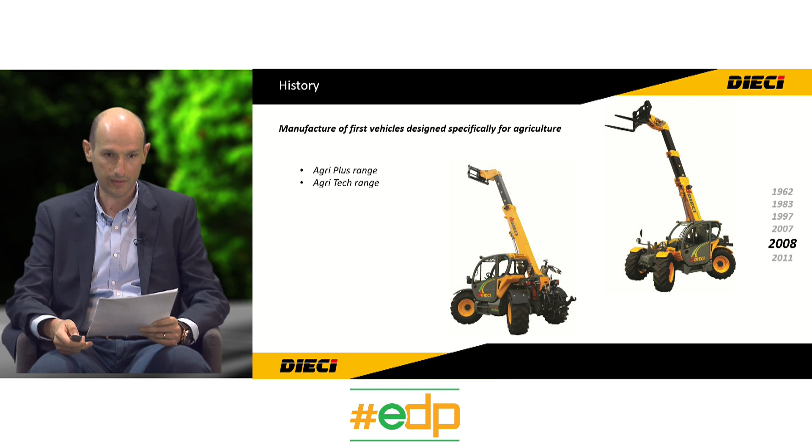Today, the facility of Dieci reaches a surface of 120,000 square meters, of which 40,000 covered. Dieci is represented in 70 countries around the world with 440 dealers and 3 branches. The production of machinery of Dieci in 2019 reached 2,800 machines, and the turnover reached 163 million euros.

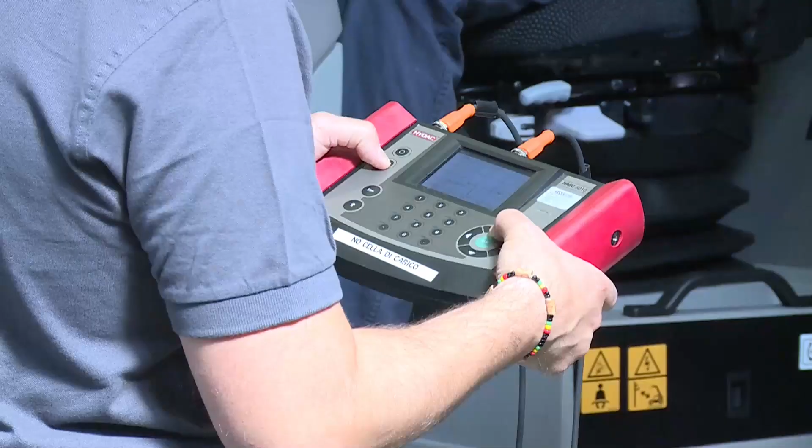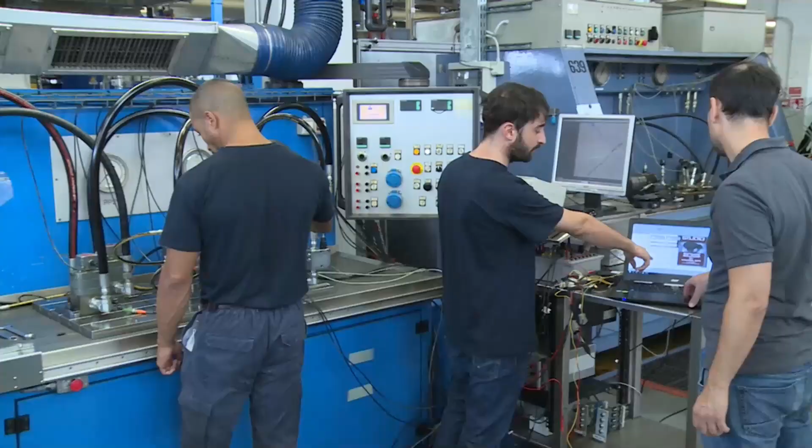Yeah, and we know from direct experience how much Dieci is investing in innovation and always trying to get improvement in the machinery evolution. I will briefly explain the context where the ALS solution was born. The ALS solution was conceived in Walvoil research and development. Walvoil is a company that is investing a lot in research and development, and the research and development department is strictly collaborating together with our test department. The test department of Walvoil is probably one of the most advanced hydraulic laboratories that we have in Europe, and there is a possibility to develop the complete product and also test on the machine.

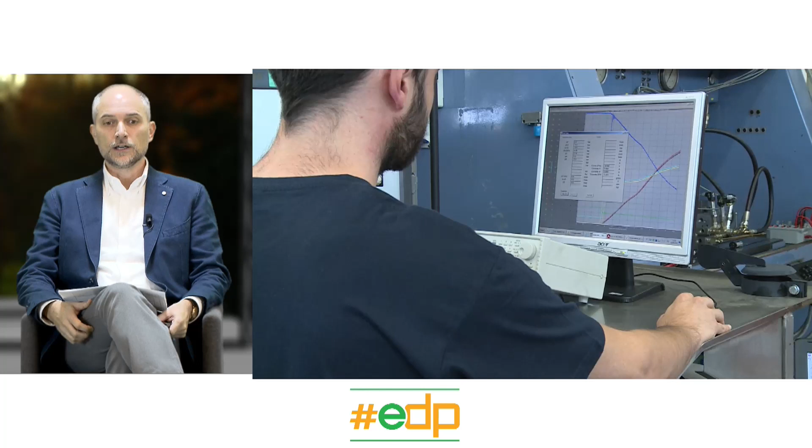The research and development of Walvoil is very focused on the environmental issue. We are always trying to find a better solution with a higher efficiency, and we are mainly focusing on two different lines of research. The first is energy recovery, but we will not talk today about this point. The second line of research is the combination of components, trying to find the ideal matching of different components in order to maximize the efficiency on the machine.

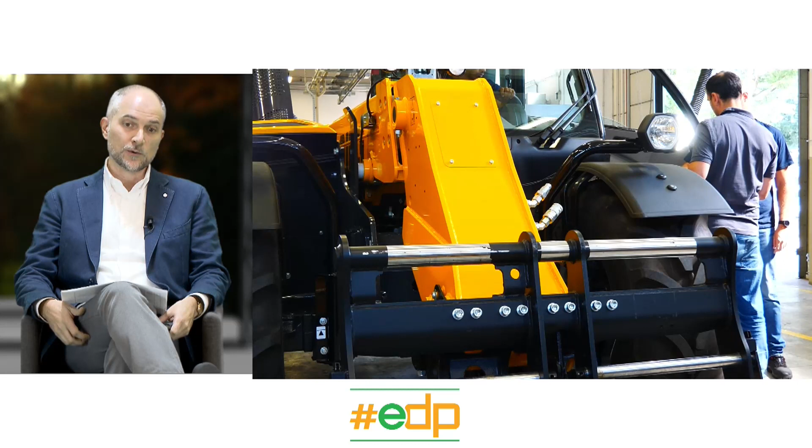This is the way where Walvoil is investing and trying to find the answer, always providing a better solution for the market and also helping our customers in finding a solution for the challenges that are coming from the market itself. We know that the machinery market is getting more and more difficult due to the regulations and the standards that are coming, and so there is a real need. We strongly believe that there is a bigger space to improve the efficiency of the hydraulic circuit.

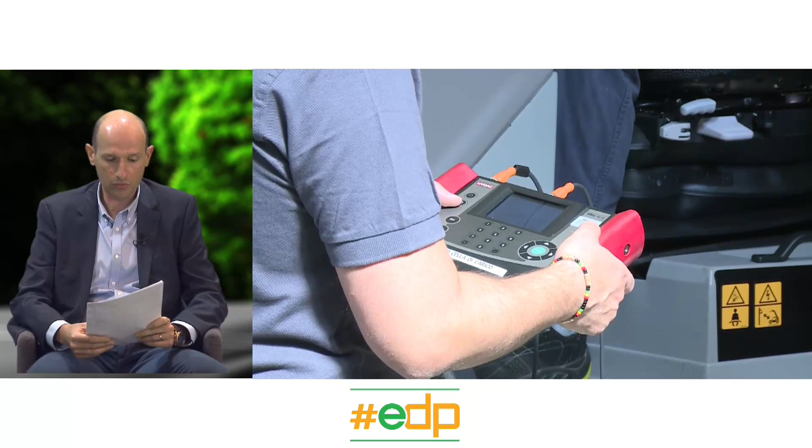Can you tell us a little more about the context of the machinery development? Yes, the stage 5 compliant diesel engines are the last frontier in terms of emission limits. In addition to seeking the engine pollution emission limits, machine manufacturers such as Dieci are pushed towards a search for vehicle efficiency in all contexts of use.

The advanced electronic vehicle control management system allows integrating the different systems contained in the machine together with the diesel engine, including the hydraulic system. This is very important in the thermal management phases of the exhaust treatment system during the machine work to ensure high comfort and control to the operator.

Yeah, and Enrico, you highlighted very well how important it is to match the mechanics and the electronics in order to find a good solution for the efficiency of machinery. And Francesco, you are a mechatronic engineer, so nobody better than you knows how important it is to match these two domains together today.

Yes, Davide. We know that the integration of mechanics and electronics can allow us to explore new possibilities and features in the hydraulic field. Walvoil believes in this technological progress, and thanks to the electronic component, it's possible to provide new operating modes for the operator on the machine in order to improve the operator experience. So thanks to this software, it's possible to customize and shape

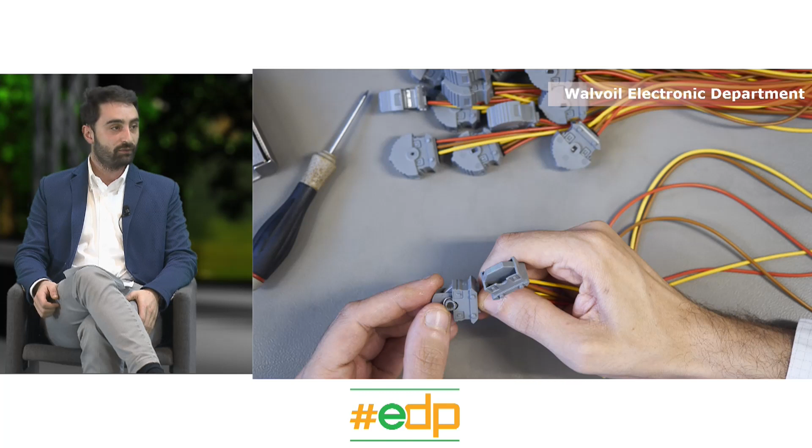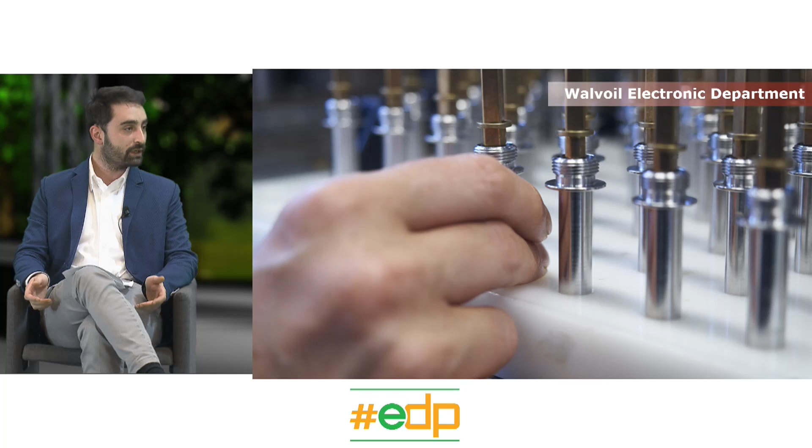some movements on the machine, and this is possible thanks to this software and the experience of the Walvoil electronic department, with 20 years of experience and a wide range of products, starting from the handles and joysticks for the movement of the hydraulic components, up to sensors and software to monitor the parameters at stake.

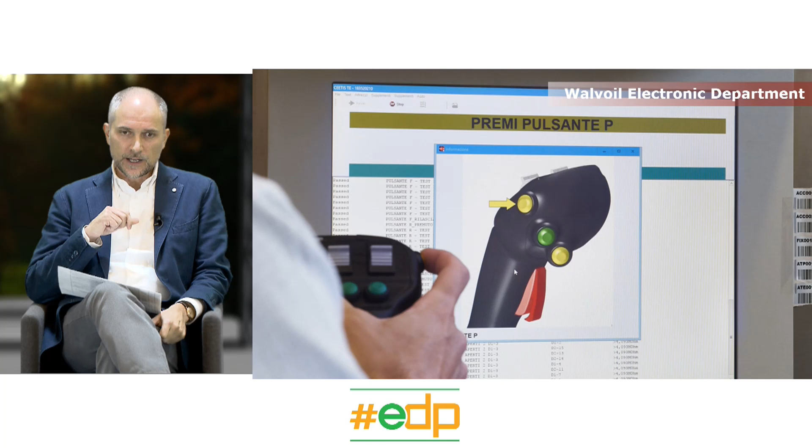Okay, a very big challenge. I think we can go a little deeper into the system and try to understand how the ALS system works. We have a presentation where we can show you the details. So we will start this presentation.

Okay, the ALS system is perfectly matching together with the flow sharing valves. It actually matches with whatever flow sharing valve is available on the market, but of course it has been optimized and works in perfect combination with the Walvoil flow sharing valves. The Walvoil flow sharing valves are normally split in two big families, the DPX family and the EX family, that are approaching the world of different machinery with two slightly different technologies.

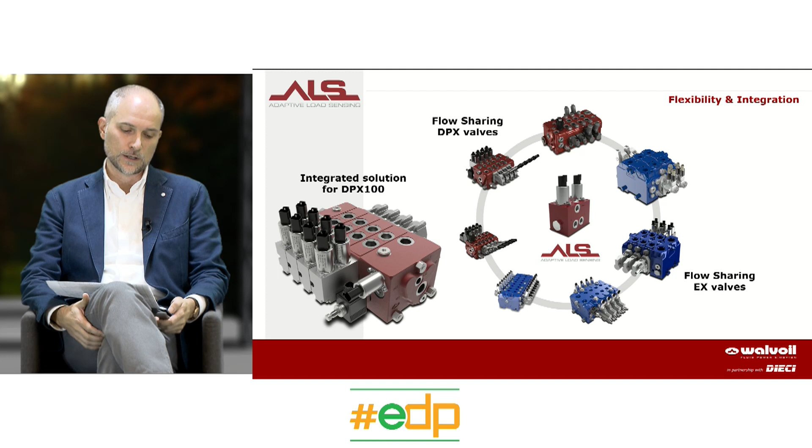So we go directly to the point, to the problem. When you have a hydraulic valve block connected to a variable pump, you are always paying a certain dissipation given by the controller of the pump. In order to realize perfect controllability of the system, you always need to provide a pressure that is higher than the pressure actually required by the user, by the load.

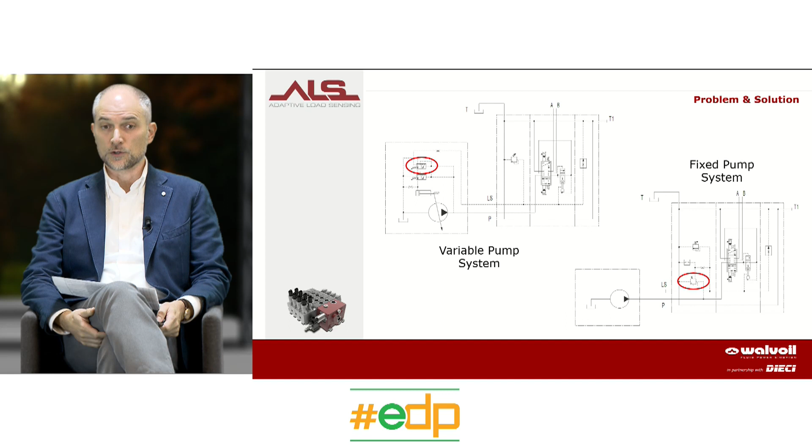Also, if you work with a fixed pump, of course, this kind of system is more economical, more cost-effective, but also much more inefficient compared to the variable system. In this case as well, when you are using load sensing and flow sharing valves, you are paying a dissipation through the inlet compensator spool, which always provides an additional pressure drop that is functional to the controllability of the load.

So when we analyze the power situation, we can see that if the actuator actually needs a certain level of power, represented in blue, every time you have to add additional power that goes completely into dissipation in the system, represented by the orange area. If you consider that in a normal cycle an average working pressure could be maybe 100 bar, this standby margin normally represents 20, 25, sometimes even 30 bar, so it can represent even more than 20% of energy dissipation in the system.

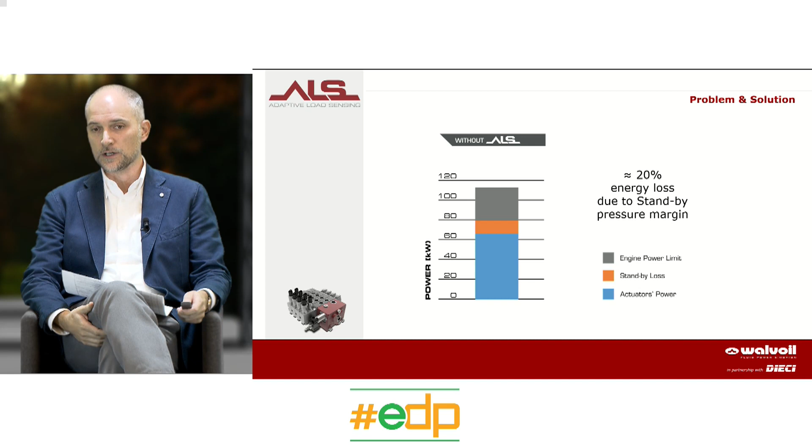So the aim of the ALS system is exactly to introduce a new variable into the system, with the possibility to modulate and modify this pressure margin according to the working condition, in order to optimize the system and find the best efficiency condition to work.

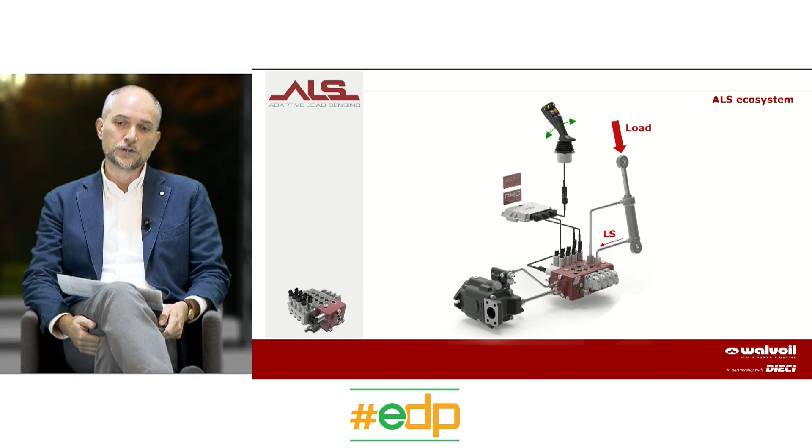This is a representation of the complete system where you can recognize the variable displacement pump, the valve block that is including the ALS device, an electronic joystick, an ECU controlling and giving the brain to the whole system, and one actuator. When you operate the joystick through the ECU, you displace the spool of the main valve and you are feeding the actuator. The actuator can send the pressure information to the valve through the LS line.

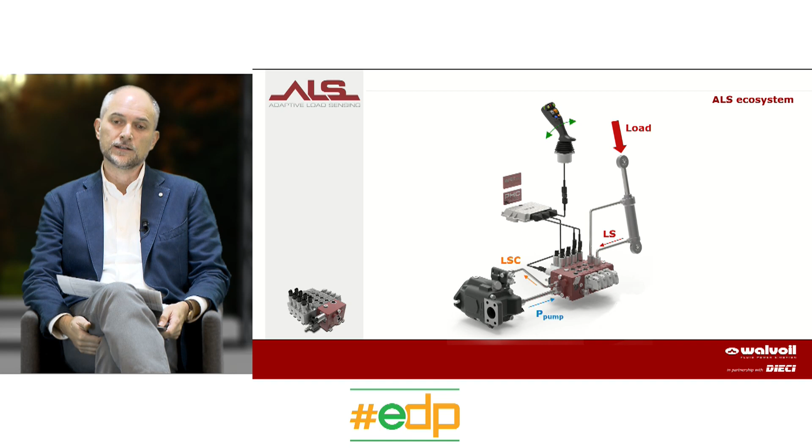Normally, this LS line is transferred directly without any change to the pump, but in case of the ALS, it is modulated by the ALS itself and modified into the LSC signal, so that the pump can provide a pressure that is related not to the real load sensing, but to the modified load sensing signal LSC.

So if you want to check how it works in a diagram, here you can see that the joystick is giving information to the ECU. The ECU is communicating to the valve. The valve is collecting the real load sensing from the load, but then this load sensing is modulated through the ALS system, thanks to the input coming from the ECU. And this LSC is delivered to the pump.

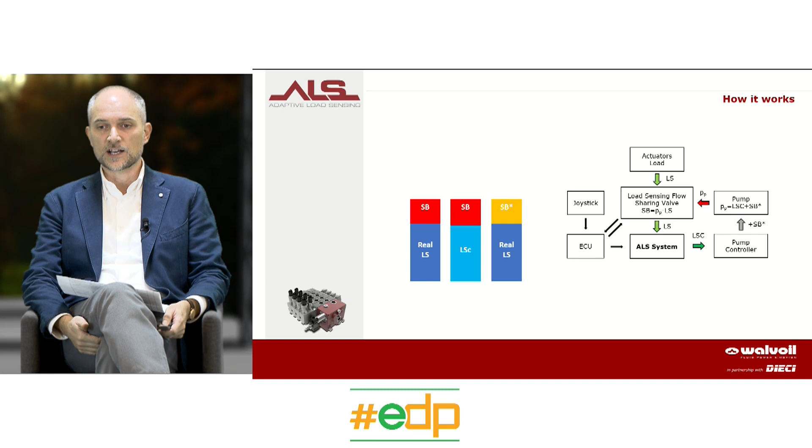The pump will add its natural standby, but the pressure P that is resulting into the system is actually modified and resulting in a different pressure drop across the spool. Here this animation is showing the variable standby that you actually have on the spool of the valve, and so you are conditioning the speed and the control characteristics.

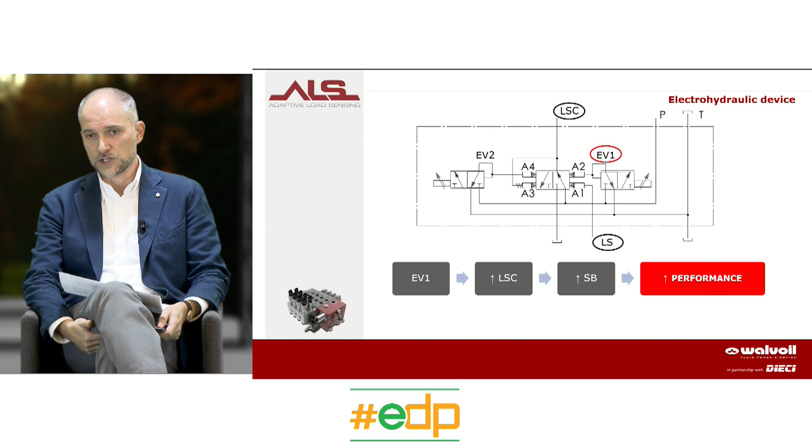The heart of the ALS system is a simple hydraulic hardware that is mainly represented by a copying spool based on a 4-signal solution. And this copying spool is conditioned by 2 pressure-reducing valves. The first pressure reducing valve is deputy to increase the load sensing, the LSC signal, and therefore to increase the standby, and this is giving an additional performance to the machine, while the second electro valve is deputy to reduce the LSC, therefore reducing the standby and giving more controllability and more energy saving possibility.

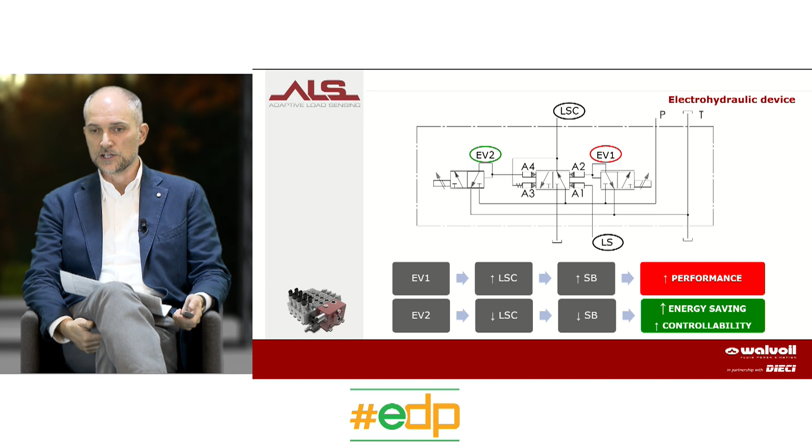During the development, we had the opportunity to release a patent that has been already approved. We thank the organization of EIMA; we have the honor to have received the award for both innovation and sustainability for this project. And it is also worth noticing that this project was developed also in collaboration with the TASC project. The TASC project is a project that has been financed by the European community, is involving the most important laboratories and universities in Emilia-Romagna, and Walvoil is participating as an industrial partner.

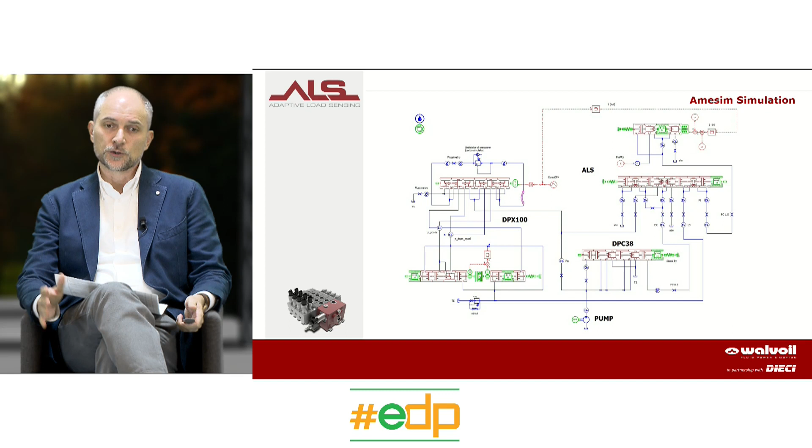Okay, during the development of the ALS, we went through 3 different phases. The first phase was the simulation that we made through monodimensional software in order to check and analyze the possible benefits of the solution. Then we went into an experimental phase where we tested the complete system on our test bench. Here we also have an output from our test bench.

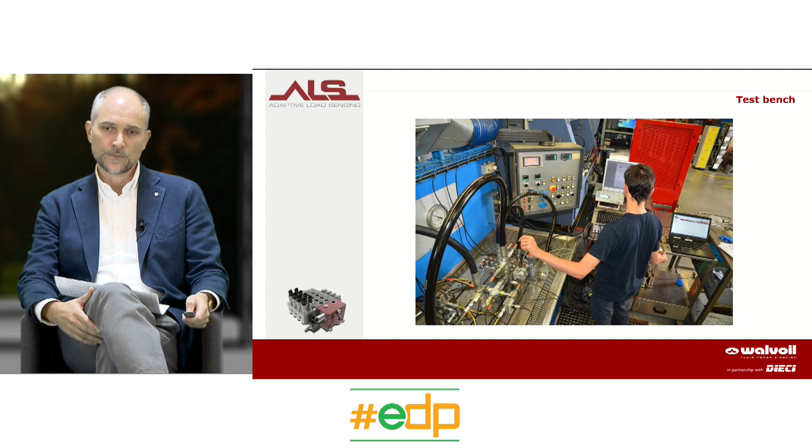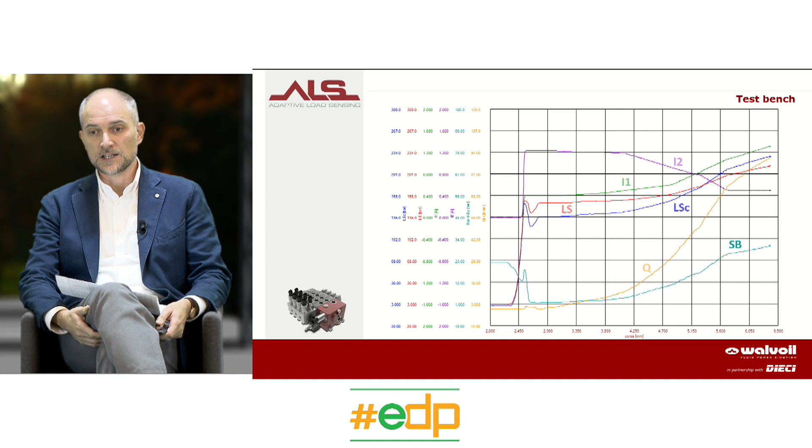From this diagram, the most technical of you can see that we have a modulation in purple and green of the 2 electro valves, and this modulation is resulting in a modification of the LSC. As you can see, the natural load sensing is in red, but the modified load sensing, LSC, is in blue. So we start with a reduced load sensing, and then at the end of the stroke, we reach an increased load sensing. This allows to change the standby across the valve from 1 bar up to 30 bar, shaping and modifying the delivery flow onto the actuator.

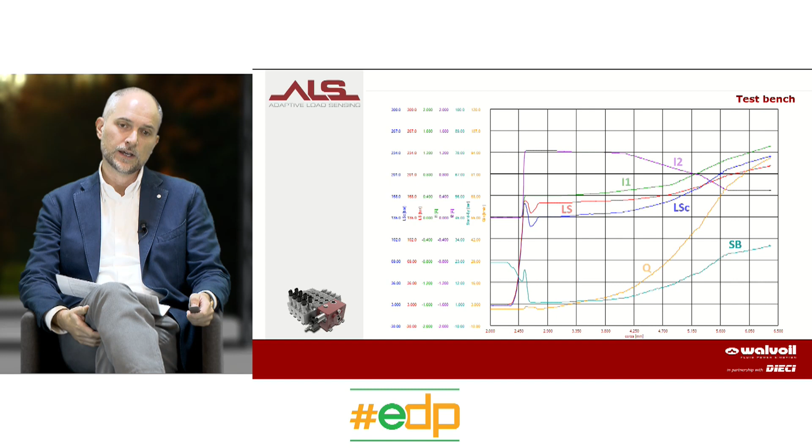Then we have a third phase, and the third phase is the application of the system on a real machine to test the benefit and understand what is the real result on a real machine. And here is coming the collaboration with Dieci. And so, Enrico, can you tell us why you chose this kind of machine and which are the characteristics of this machine?

Davide, we chose the Agri Plus. That is one of our most important machines for the agricultural market. Agri Plus is in 2 models, 42.7, 4.2 ton lift capacity at 7 meters, and 40.9, that is 4 ton lift capacity at 9 meters.

Agri Plus is a high-performance telehandler that we developed and studied for professional use, for customers that need high performance on telehandlers. The Agri Plus includes the new cabin developed together with Giugiaro Design, where we introduce many improvements focused on the comfort of the operator. It's a wide cabin with precious materials, soundproof materials, with an exclusive hydraulic suspension system.

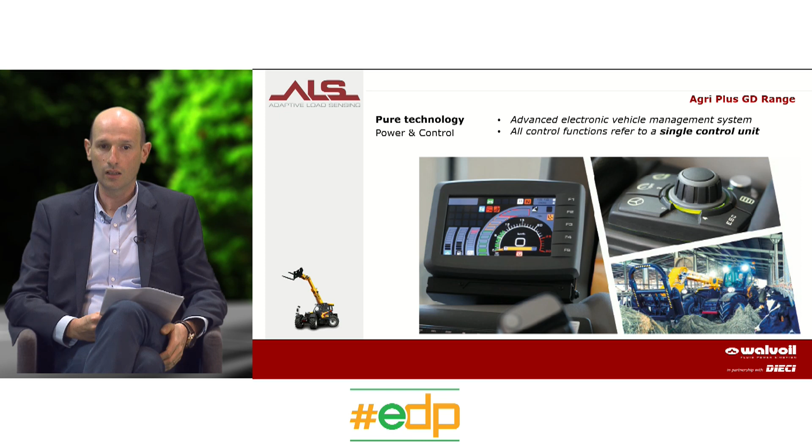In the Agri Plus, we introduce high technology with an advanced electronic management, and by a single control unit, we can manage all the functions included on the machine, integrated with the diesel engine.

With this high technology, we give a high performance machine with a high performance engine, 114 kilowatts, stage 5, with an electronic integrated control and a low emission. This integrated electronic management system performs also a very strong and fast transmission with a cruise control in the cabin that can manage 4 different drive modes. And combined with these drive modes, we can add also the management of ALS.

Okay, thank you. Very interesting.

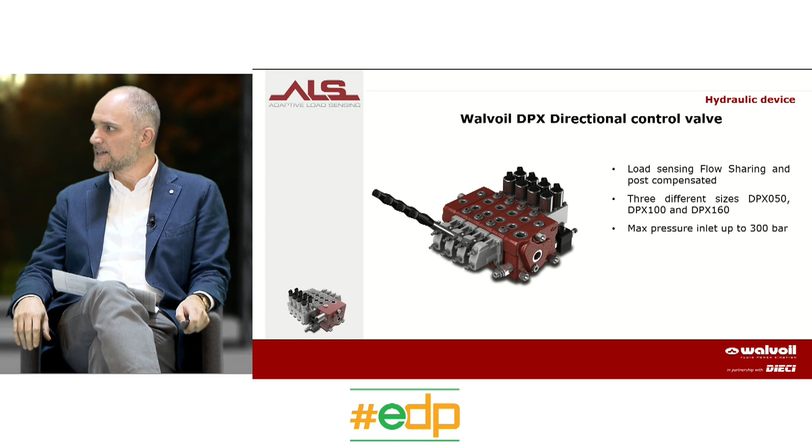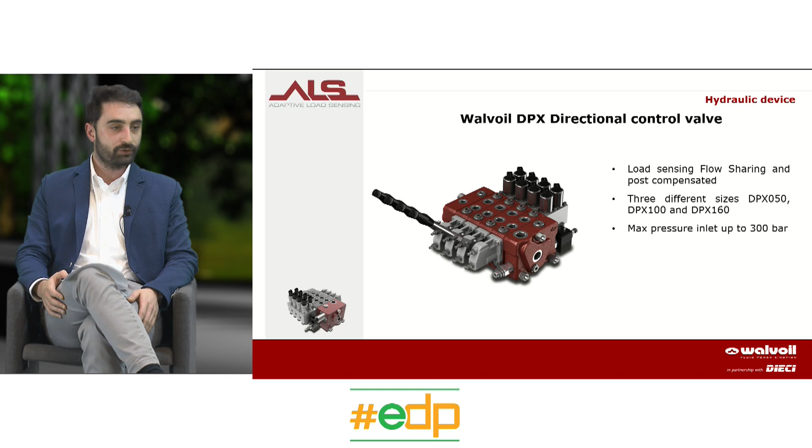If we go a little deeper inside the real hydraulic heart of this machine, we can summarize which are the main components that are taking part in the ALS system. Yes, the ecosystem ALS is composed by Walvoil DPX. The DPX family is a family of post-compensated load sensing flow sharing section valves. And there are 3 different sizes of DPX, the DPX 50, 100 and 160. The difference between these sizes is the workflow port, and the 3 sizes have the same max pressure inlet up to 300 bar.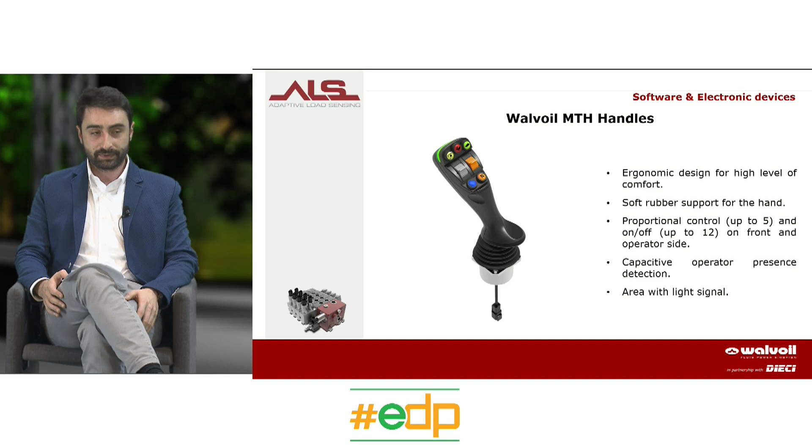The second component for the ALS ecosystem is the Walvoil joystick. This joystick can be in 2 different versions: an analog version, the AJV, with an optional redundant signal, and a CJV with a redundant signal, but in a CAN bus version. And in order to have an ergonomic design, it's possible to use the Walvoil MTH handle. This handle has a capacitive sensor that can detect the operator presence.

But the real heart of the ALS system is the Walvoil ECU, in particular the CHED 1200. With this ECU it's possible to control 12 sections of section valves, and with the 24 inputs it's possible to acquire digital, frequency and analog signals. And there are also 2 sensor supply outputs. And then the software, finally.

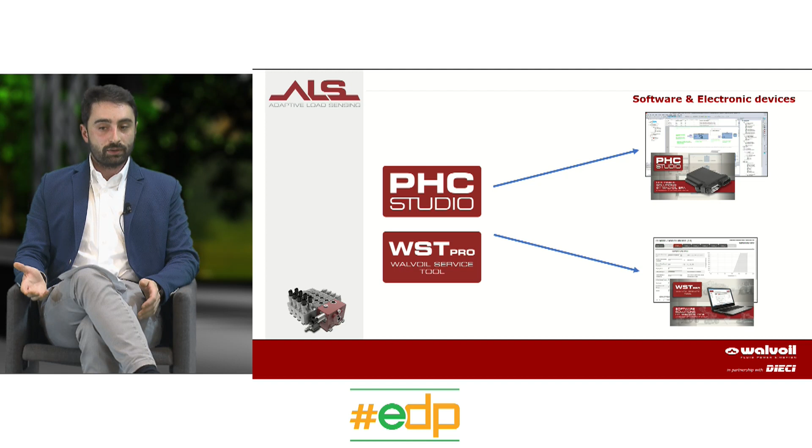With the PHC Studio, the proprietary Walvoil software, it's possible to program the ECU with one of the programming languages cited by the IEC standard. The WST is a proprietary software of Walvoil, and with this software it's possible to monitor the working parameters in real time. So for custom applications we use the PHC Studio, but for standard applications it's possible to use WST.

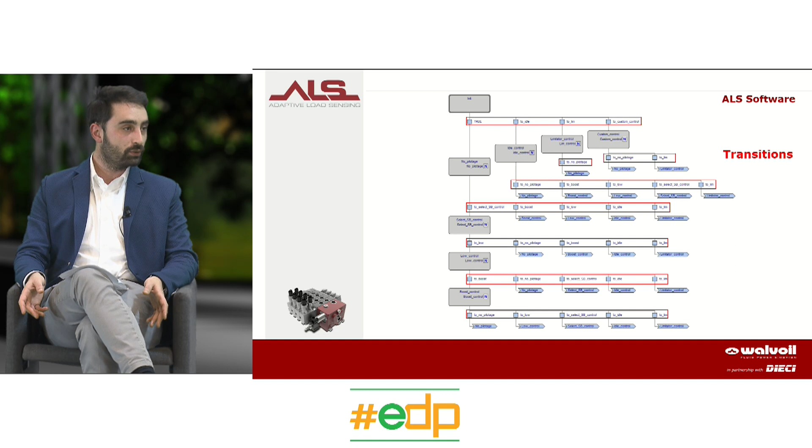Now it's the ALS software moment. The ALS is programmed with an SFC language, a sequential function chart, and with this software it's possible to obtain all the modes of the ALS. In particular, there are transitions and actions that command the different modes of the ALS system. With the transitions it's possible to exit or enter different actions. So when a transition is verified, this means that the operator wants to change the operating mode from the actual one. And the actions contain the instructions for the operating mode that the operator has chosen.

Okay, great. So which are the functions? Yes, the ALS has 2 types of activation: desired activation by the operator or automatic activation by the software. For example, this is a security when the machine is on, and an automatic activation can be the power limitation. But the desired activation by the operator, the basic function of the ALS system, can be the boost or the precision. With the boost, it's possible to increase the flow rate to the actuators in order to have greater machine speed and productivity with an increase of standby.

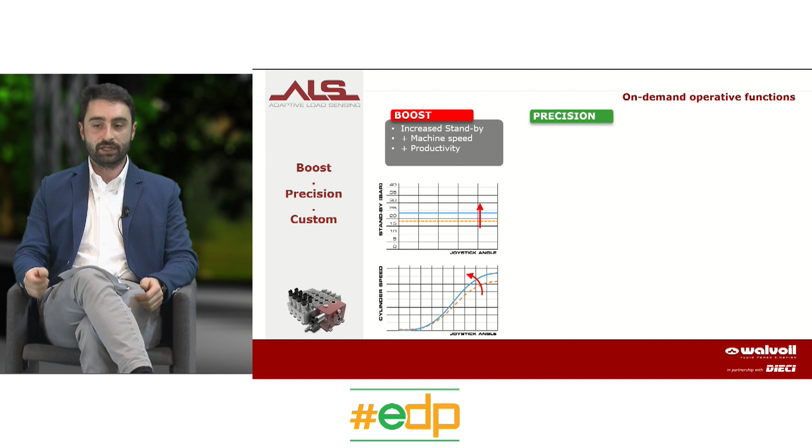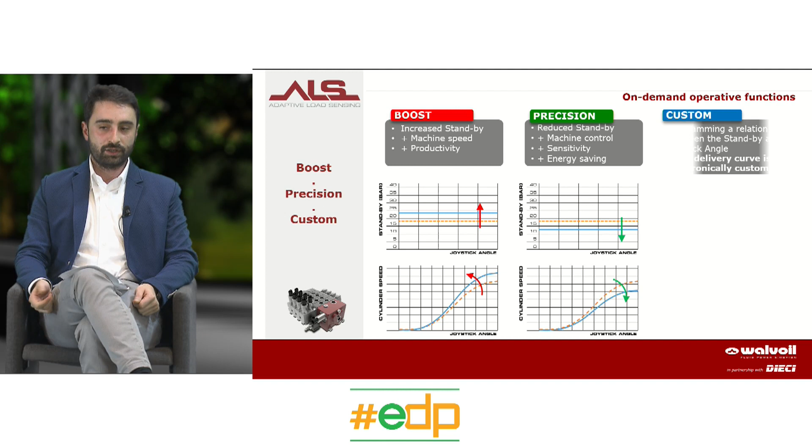On the opposite side, there is the precision. With the precision mode, it's possible to have greater machine control and sensitivity because we have a reduced standby and flow rate. But the most important function in this case is the custom. This is a function that is a combination of the two previous modes. With the map that correlates the angle of joystick and standby, it's possible to obtain a custom curve tuned for some particular application on the machine.

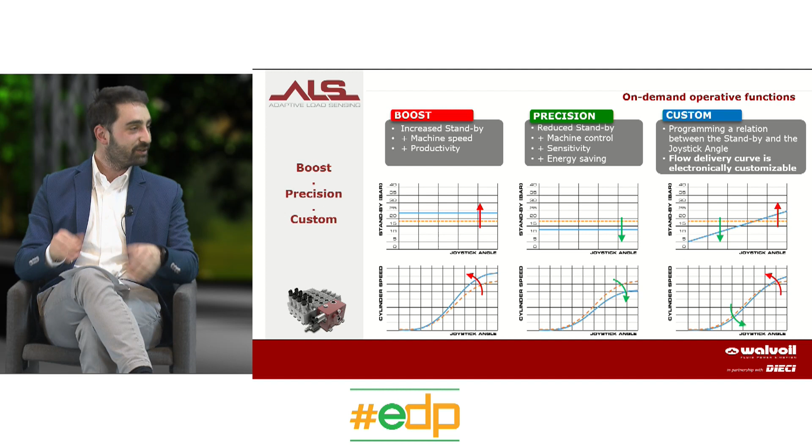So we can shape exactly the delivery curve to the actuator, customizing it and also making it more comfortable. Yes, for example, in the initial part of the curve, it's possible to obtain precision. So for a movement that requires bigger machine control, it's possible to obtain precision at the first part. But when a movement is ended, it's time to go, and the boost condition is activated.

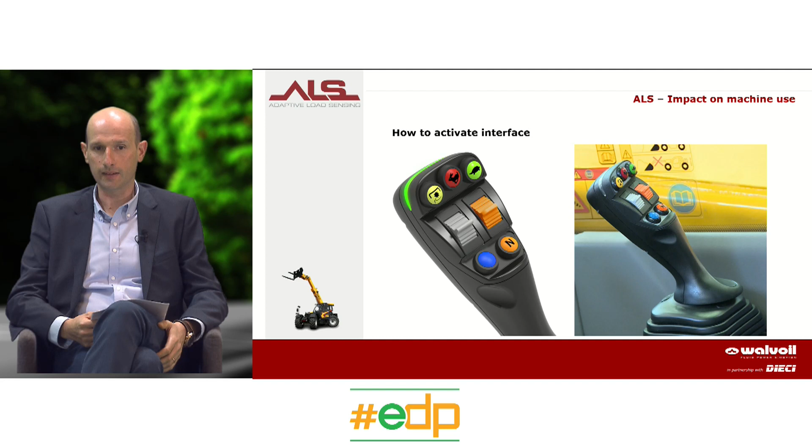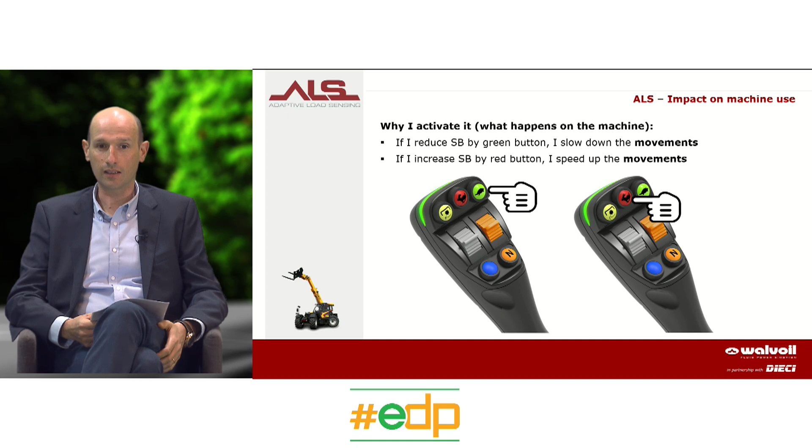Okay. But on the machine, Enrico, how is it possible to activate the ALS system? Yes, we integrated the ALS activation system with two buttons on the grip of the joystick, the green button and the red one. Acting on these two buttons, the operator can ask for standby reduction or standby increase. If we push the green button, the standby is reduced and the movement slows down. If we push the red button on the grip, the standby is increased and the movement speeds up. Yep.

And this means reducing the speed of the movement, even if the stroke and the angle of the joystick don't change. So without losing the resolution of the control? Yes, and the main benefit of this is the better sensitivity and better control for the operator. Okay.

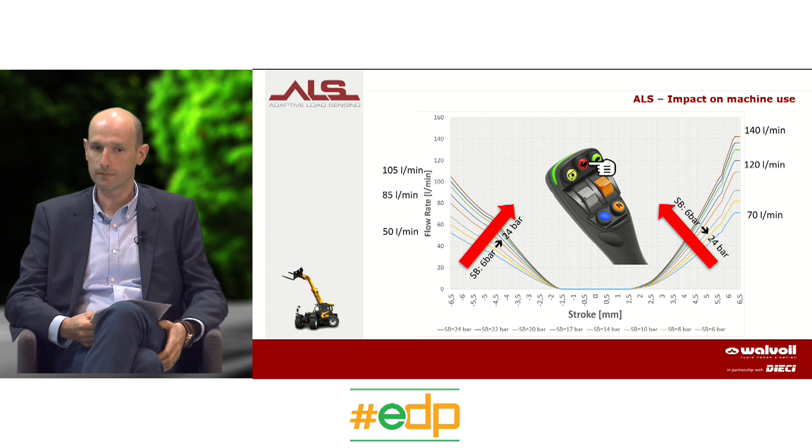The same way, we can increase the standby. For example, if you want to increase the speed of the movement, we can push the red button and go from, for example, 120 liters to 140. For certain applications, when the user of the machine is confident and needs speed, with the red button we can get it. Okay. And these are not the only possible on-demand functions of the ALS system.

For example, there is also, and this is probably one of the most complicated from the software point of view, where there is more software behind, the possibility to look for the maximum efficiency target. It means that the system, by reading some parameters on the machine and having inside the complete mapping of the spool, of the characteristics of the directional control valve, can make some advanced evaluation in order to find the best efficiency condition to realize a specific flow.

So actually, in this situation, the joystick is electronically setting the flow expected by the user, and the system decides by itself under which condition to reach that specific flow. We are using some mapping similar to the diagram that you can see at this moment. It's a typical map where we have on the x-axis the standby pressure, so the standby margin, and on the y-axis the spool displacement, which means the metering passage area.

The curves that you can see are isoflow curves, so it means that we can reach a specific flow for different combinations of standby and spool position. A normal system will work along this dotted line, so there is a fixed standby, but the ALS system can try to reach a specific flow through another path, reaching the flow in a different condition, minimizing the standby.

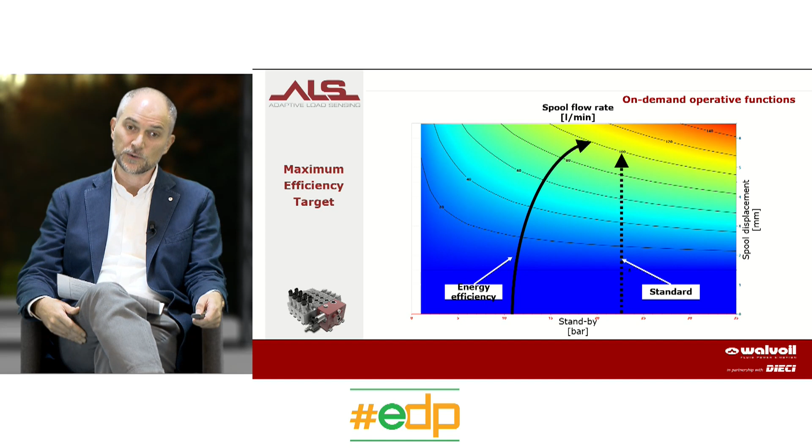Of course, there must be a mapping that is deciding when it is worth it and when it is not. Sometimes there's a compromise to be found, but there is a huge possibility to increase the efficiency of the machine. Yeah, with the adaptive algorithm, it's possible to reach this result. Yes, let's say it's an adaptive algorithm.

Exactly. Another typical additional function, in this case not an on-demand function but an automatic function, is the power limitation. When the system can collect the system pressure, the flow rate, and the engine RPM, it can automatically evaluate the power requested by the operator, and it can compare this power to the power limit given by the

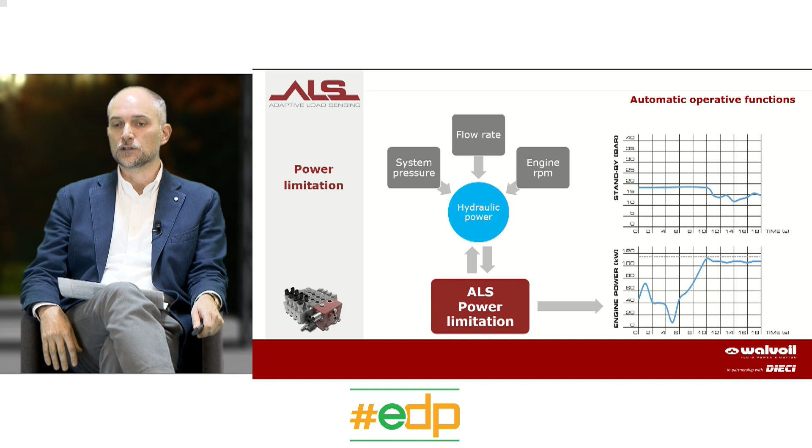ICE engine. And in that case, if we are reaching the maximum allowable power, the system will automatically reduce the standby, having a benefit in terms of pressure, but also and mainly a benefit in terms of reduced flow, so that the machine is kept under a certain power limit and it doesn't stall.

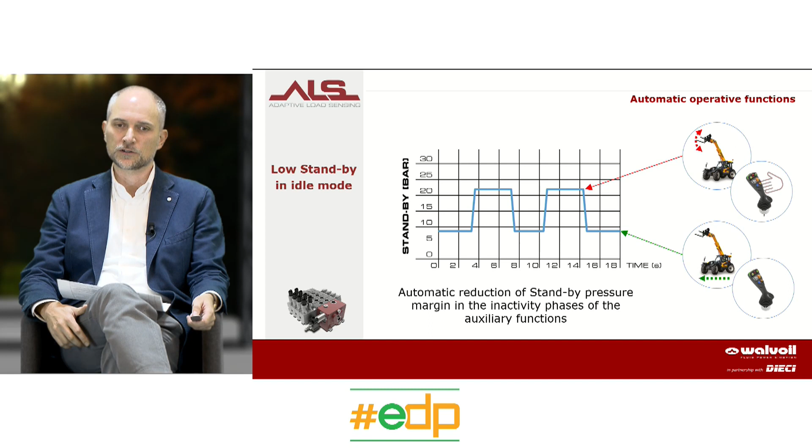Another typical application is, for example, the possibility to use the dead man sensor, the capacitive sensor, for detecting the presence of the operator on the grip in order to activate or deactivate the standby. When the auxiliary function and the boom are not used, there is no reason to keep the standby at a high level, and so we can drop it down in order to have additional efficiency.

So I think, Enrico, we can have a general summary, understanding exactly what we can actually see on the machine as a benefit, summing all these functionalities together. Yes, we speak about efficiency, and the ALS can help us get efficiency, because if we reduce the standby when it's not necessary to use the boom, for example, in machine traveling phases, we can reduce the hydraulic pressure drops, improving the efficiency in general and reducing consumption.

If in opposite, we increase the standby only when it is required. With smaller hydraulic components, we can achieve higher performance only when it's necessary and only when the operator asks for it.

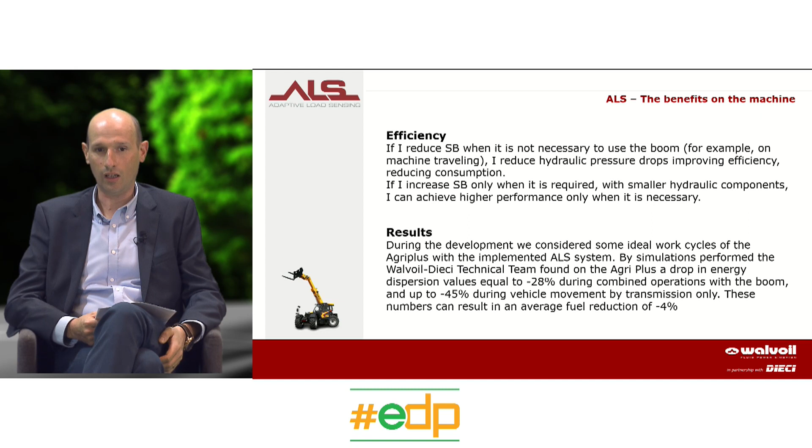The results we found during development: we considered some ideal work cycles of the Agri Plus with the implemented ALS system. By simulation performed by Walvoil and Dieci technical teams, we found on the Agri Plus a drop in energy dispersion of about minus 28% during combined operation with boom and transmission, and up to minus 45% during vehicle movement only by transmission. These numbers can result in an average fuel reduction of minus 4%.

Efficiency is not the only benefit we can get. We can also consider reliability of the machine equipped with the ALS, because if we reduce the standby when it's not necessary for machine operation, we can reduce the stress of the components, since we reduce the maximum pressure, and this extends the average life of the components.

We can also improve productivity, because with the automatic functions, if we reduce the standby, we reduce the movement and improve the sensibility of the control. This also reduces the errors and mistakes that the operator can make, while maintaining the same joystick stroke and better sensibility of control.

If we increase the standby, for example to speed up the movement, expert users can get the best performance and increase the speed of the movement when needed.

If we combine the automatic function of the ALS with the anti-tipping device, we can reduce the standby when the machine is near the tipping limit. In this condition, when we are at the limit, we can lower dynamic loads and stress and improve safety. So it's a very important step for safety.

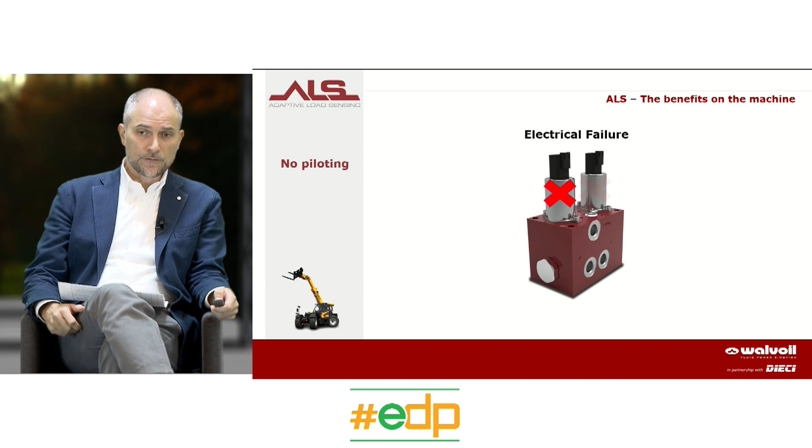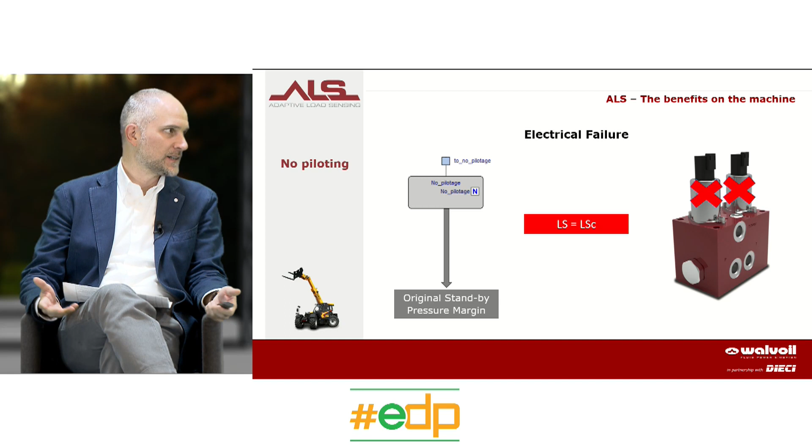We also have to notice and remind that the system is inherently fail-safe, because in case of failure of the electronics, if you are missing the piloting to the electro valves, it will simply copy exactly the load sensing system. So we will get exactly the standard load sensing system without affecting the controllability of the machine, so it is inherently safe.

We can speak also about the versatility of the system, because that's interesting. We think telehandlers are one of the most flexible machinery for agricultural application, because it's a multi-purpose machine that changes functionality by changing the interchangeable equipment.

We can adapt the standby to the interchangeable equipment connected to the machine. In this way, we can optimize the speed of machine movements compared to the attachment. For example, with a man basket, the machine must move slower than with a bucket or a shovel. By modifying the standby, we can get high resolution on the control and low speed.

The flexibility is also a big benefit, because the standby can be managed manually and automatically by integrated software functions in the vehicle control management. This can guarantee optimal performance in every condition.

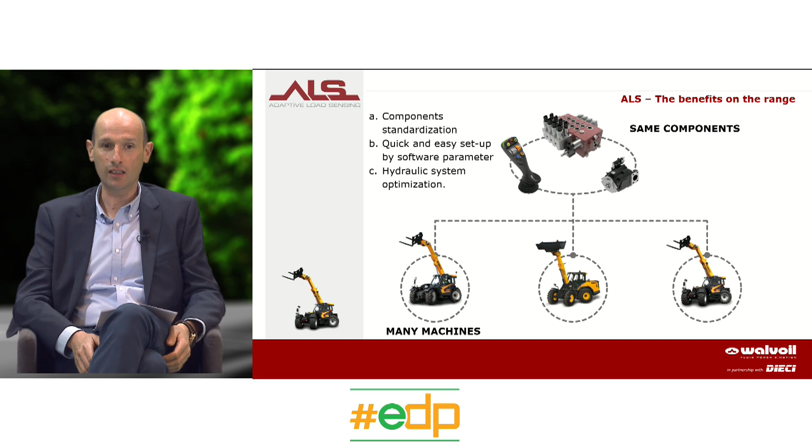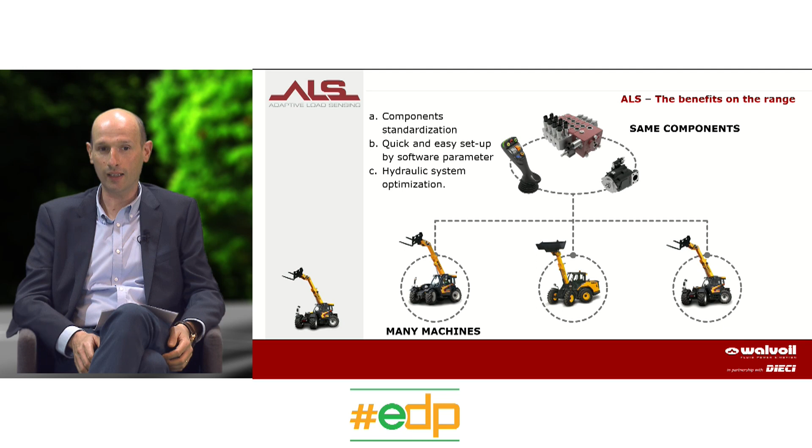The benefits are not related only to the machine, but as producers of machines, we can consider the benefit also across the range of our machines, because with standard components and one hardware, we can set up different systems in a quick and easy way. We can configure the same components in different machines that require different standby settings. In this way, we can optimize the hydraulic system for each machine. Same hardware, then dedicated parameterization according to the specific need of every single machine.

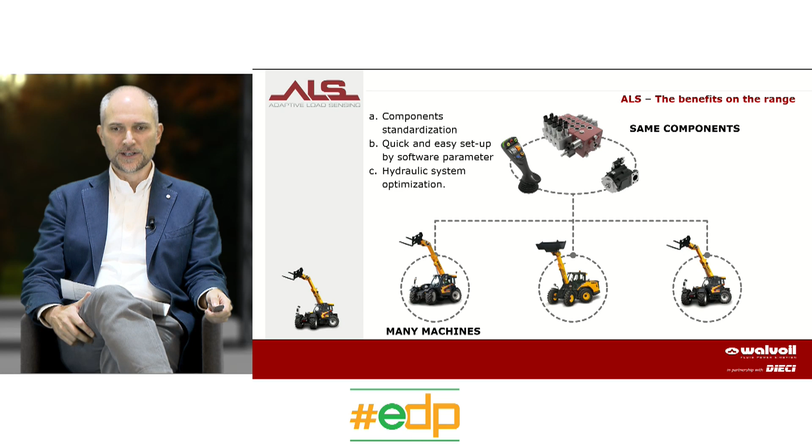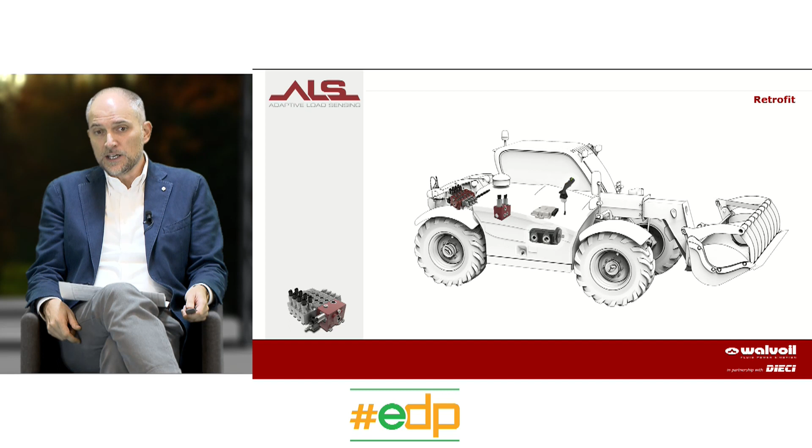I'll add another interesting point: the components of the ALS system are so simple, they only require a dedicated manifold, an electronic joystick, and ECU, which can also be introduced into an existing machine. So we can also talk about machines already working in the market, and it is possible to upgrade the machine and bring it to new life, to a new level of efficiency, which can be an interesting solution also for the aftermarket.

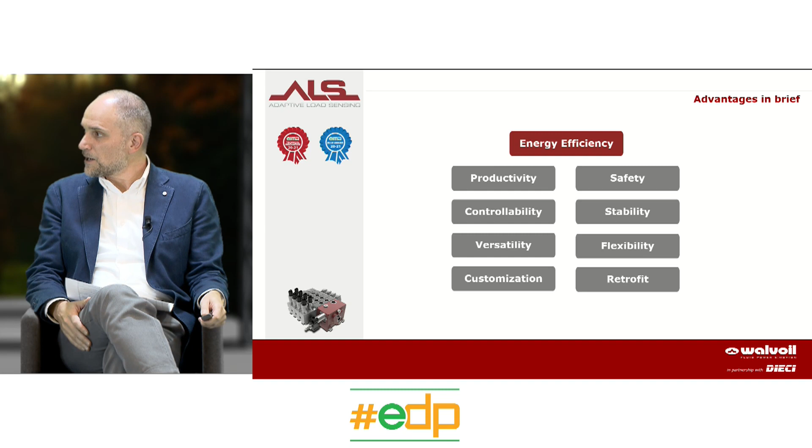So we have this final slide where we are summarizing all the points we have discussed. This is what we are testing today on the machine, confirming our original simulation. These are all the benefits that the system can provide. I think we can conclude this presentation, the technical presentation of the product.

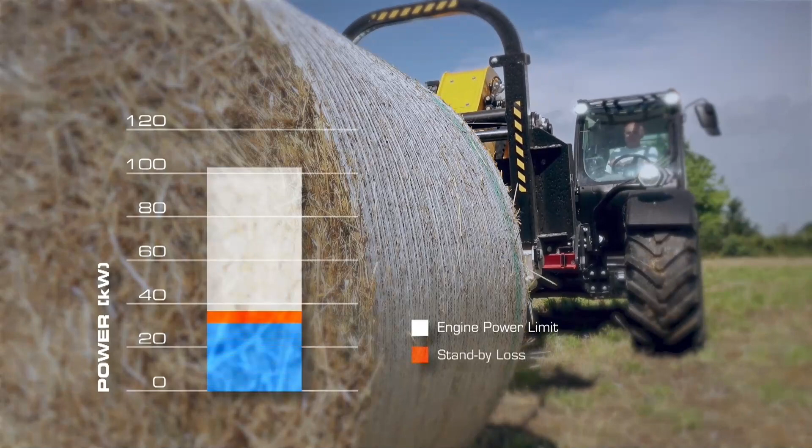The context: a typical cause of the loss of efficiency of a hydraulic system is the standby pressure differential. The hydraulic pump, in order to ensure the control of movements, generates a pressure constantly higher than the actually required one. It is defined as standby margin and constitutes an energy dissipation.

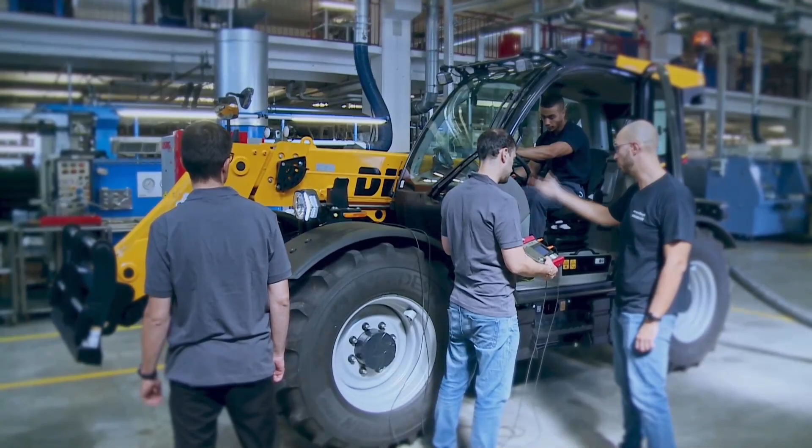The adaptive load sensing solution. Adaptive load sensing is the answer to this problem. The innovative system has been developed at Walvoil Research and Development Department and tested in collaboration with Dieci, a leading company in the telehandler sector.

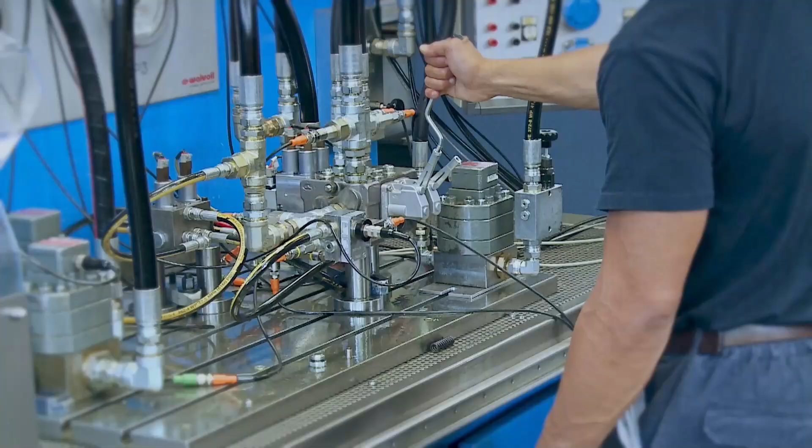This development is also part of the TASC, Smart and Clean Agricultural Tractors project, co-financed by the European funds of the Emilia-Romagna region and including the participation of international partners and the main regional universities and research laboratories. Adaptive load sensing is patent pending.

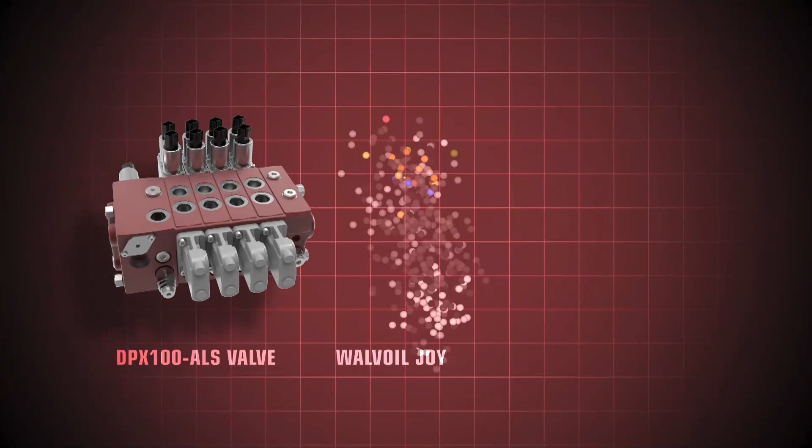How it works: the system consists of a directional control valve, an electronic joystick, and an electronic control unit. The heart of adaptive load sensing is represented by an electro-hydraulic device fitted to the directional control valve, which allows dynamic modulation of the standby margin in order to minimize energy consumption.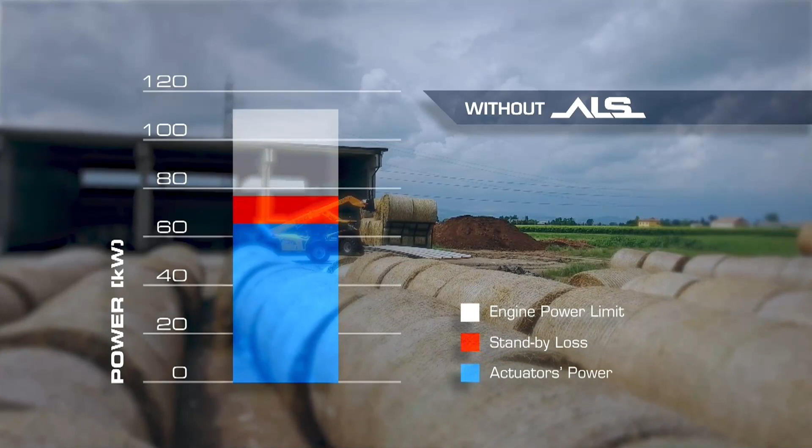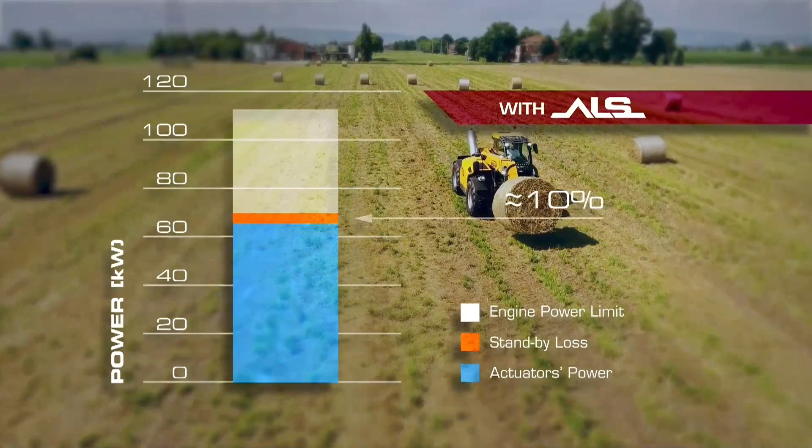In traditional load sensing systems, the standby pressure differential may lead to a dissipation, loss of up to 20% of the system energy. And since it is preset, it limits the performance of the engine at the top of its operating range. Adaptive load sensing would bring the dissipation levels to around 10%, therefore improving the engine performance across all duty levels on the engine performance characteristic curves.

The system consists of an electronic control unit that collects information from the operator and from the machine sensors. The electronic control unit operates the adaptive load sensing device, allowing it to raise or lower the load sensing hydraulic signal and consequently vary the pressure differential to dynamically adjust it to the efficiency and functionality requirements.

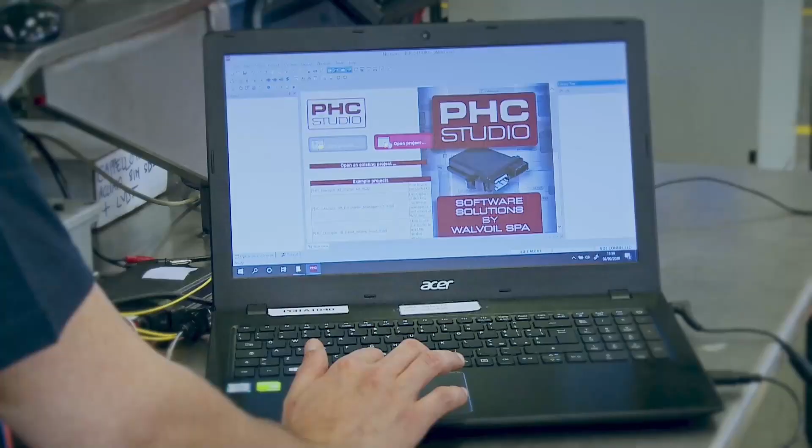The system is completely managed by a modular and customizable software developed by Walvoil using the PHC Studio proprietary tool.

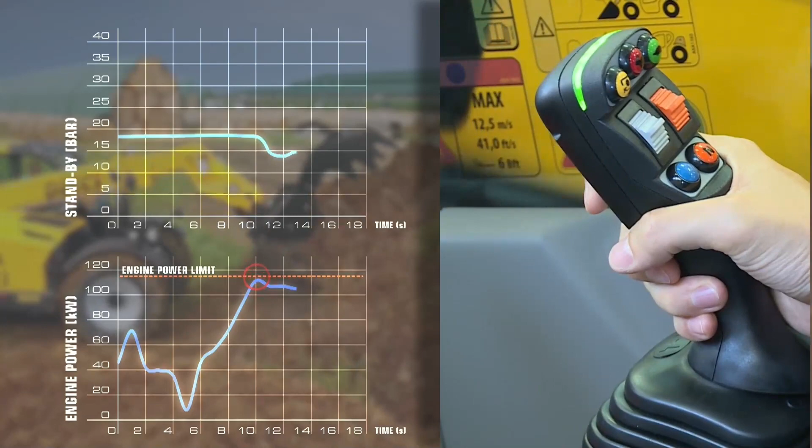Operational functions: the software basically includes several automatic functions, selection of the maximum efficiency conditions, power limitation management to ensure full exploitation of the engine characteristic curve, and automatic reduction of standby pressure in the inactivity phases of the auxiliary functions.

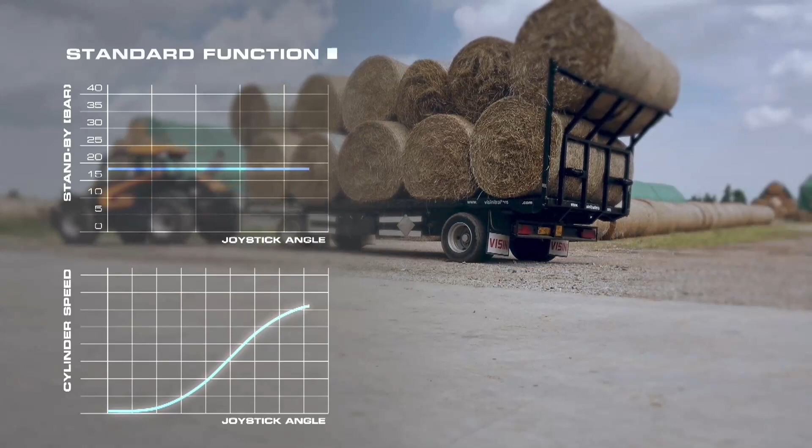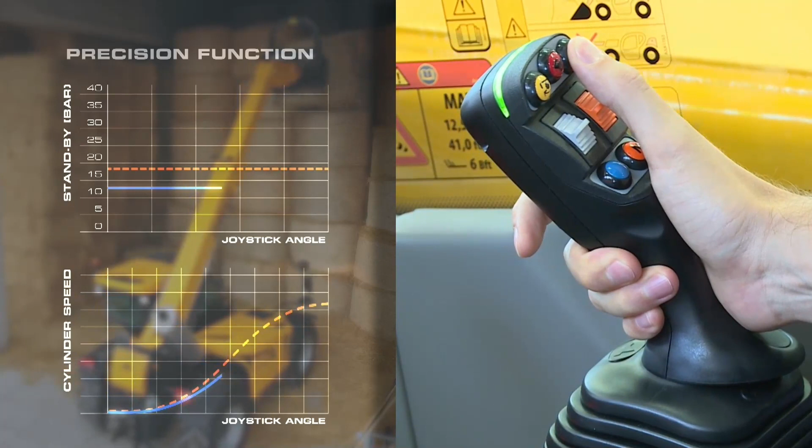Moreover, additional functions are available to optimize control and can be selected by the operator using the joystick controls. The precision function reduces the standby value, allowing improved accuracy and sensitivity of the operation. The boost function temporarily increases the standby value for higher speed and productivity without installing larger pumps.

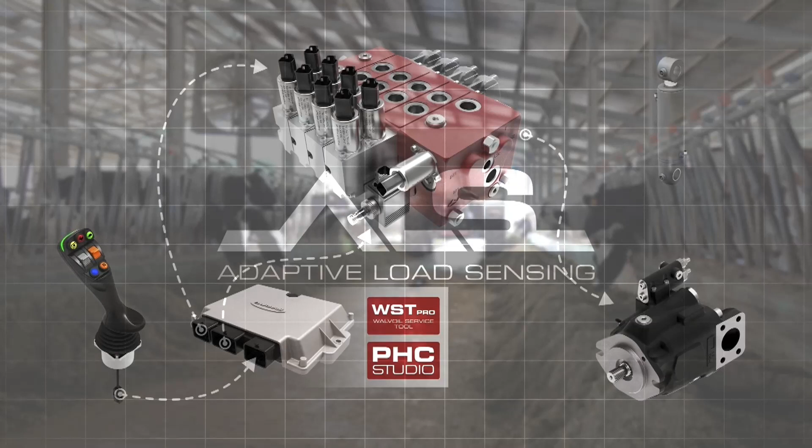Safety. Unlike previous variable standby systems with electronic devices on the pump, adaptive load sensing operates directly on the load sensing hydraulic signal, thus avoiding the complexity associated with signal digitization.

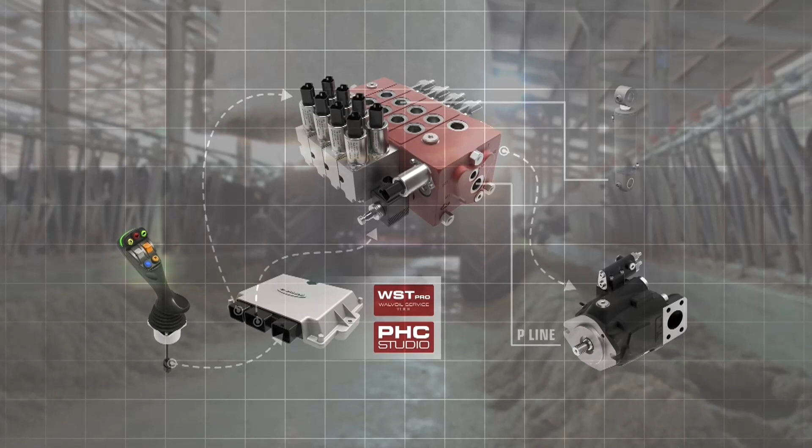The adaptive load sensing system can also provide two independent controls to increase and reduce the signal so that, in the event of faults, the system works with the natural standby of the pump, keeping full functionality. These combined aspects make adaptive load sensing an extremely robust and safe device.

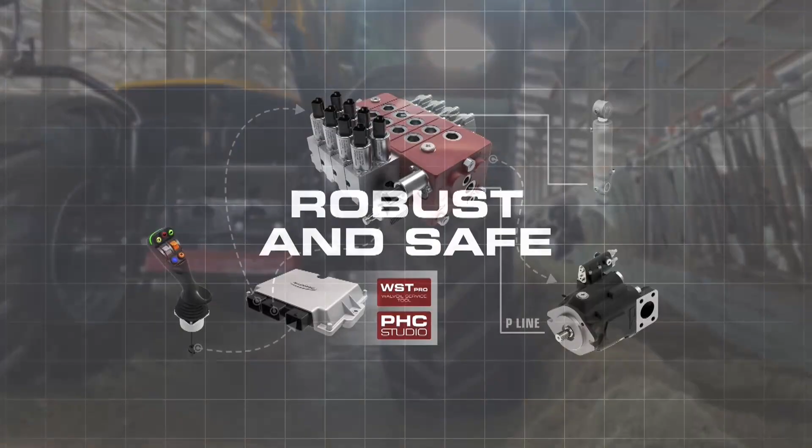Stability. The smart management of the standby pressure differential, combined with the operation of the directional valve, allows optimization of the stability of the machine for a more comfortable use.

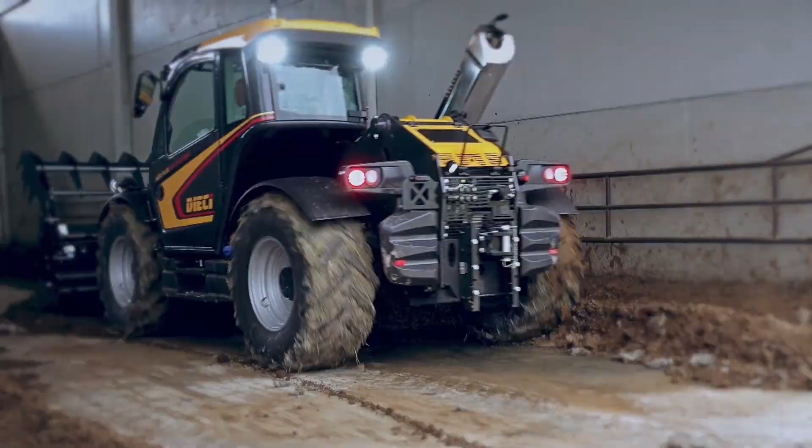Retrofit. Since adaptive load sensing consists of a few additional elements, it can be easily interfaced with traditional hydraulic components and retrofitted on machines already on the market, bringing greater efficiency and productivity.

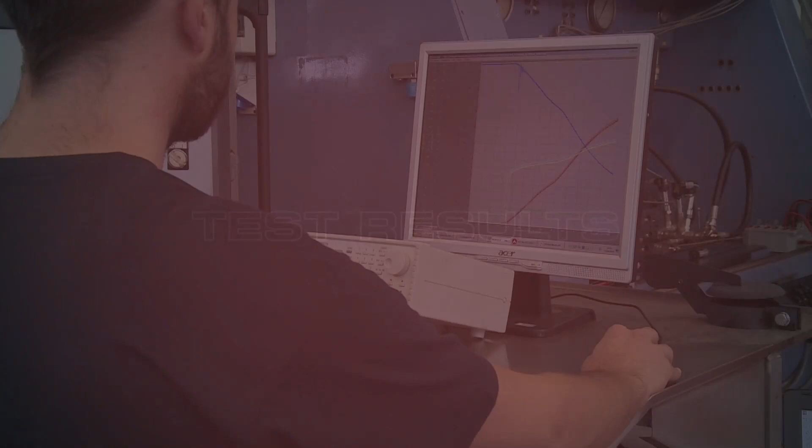Test results: tests carried out on the Dieci Agri Plus GD 42.7 Telehandler, equipped with two fixed displacement pumps, showed the following reductions in terms of standby energy loss: minus 28% during boom operations, minus 45% during traveling operations. It results in a global energy save of up to 5%, depending on the considered operating cycle.

Considering also the increased functionality and the better exploitation of the endothermic engine, the level of innovation introduced by adaptive load sensing is even more evident.

Energy efficiency, productivity, controllability, customization, safety, stability, retrofit — it's all about the Walvoil adaptive load sensing system.